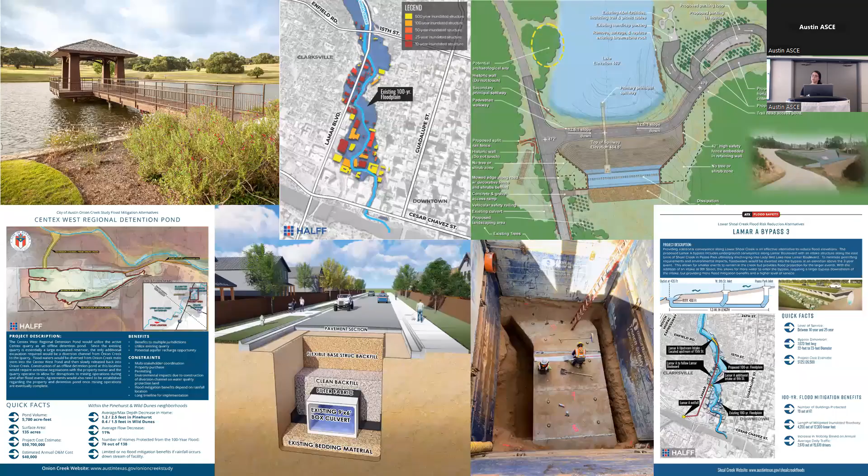Our Richardson office is our headquarters. And then furthermore, in the last couple of years, we've been expanding in Austin. So we now have a North Austin and a South Austin office. All these offices really support our solutions. Halff is organized in 6 different solutions groups: energy, environmental, mobility, placemaking, technology, and water. To give you guys a little overview of some projects we are a part of here in the general area.

Right picture is the Bastrop State Park Dam. This dam actually failed in the 2015 storm events that also Austin experienced as well. So Halff was a part of the multiple different ways. We did the H&H analysis, the design work. We also did survey, environmental, and also engaged our landscape architecture group to help with some of the park features. So that was a fun project to be able to collaborate internally, and the dam finished construction this year.

In the center there, this was a big project last year. It was in East Austin. The two center pictures on the bottom, there was a culvert in a residential area. It outfalls into Lady Bird Lake. And the culvert was experiencing some leakage, so it was impacting the subsurface, and the residential area was having some failure in their roadway service. So we were able to excavate, fix, and repair the culvert. And then in the meantime, we also, once again, was able to engage other facets by replacing the stormwater, water, and wastewater utilities. So that residential area is now fully repaved, and also the subsurface is mitigated.

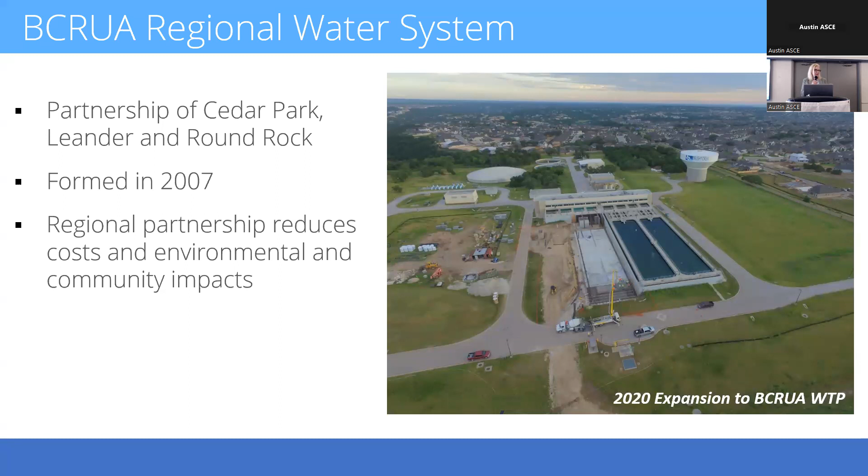This is a picture of the water treatment plant. Right now you can see there are 2 water treatment trains also completed, and we're working on the 3rd one right now because there's a lot of demand and a lot to keep up with. So this map shows the facilities that were built.

The red line is, you can see Lake Travis, the arm of Lake Travis is on. The red line is a pipeline that goes all the way to Round Rock. So all that infrastructure was built initially—about $130 million loan taken out from the Texas Water Development Board, and that all occurred in 2012.

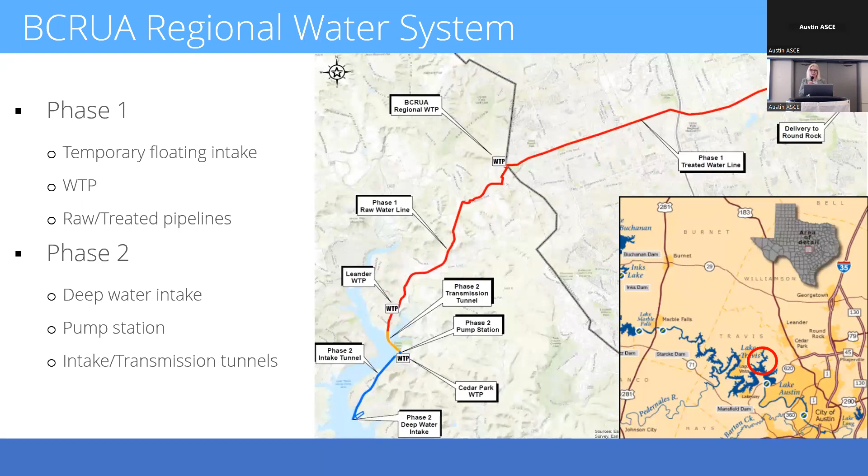Well, all along, the cities realized that floating intake on Lake Travis would not be a good long-term solution. So that's phase 2, deep water intake. But it was really planned from the very beginning. So this is a picture of the floating intake on Lake Travis.

Lake Travis hydrology, which I know some of you all do, but there was one year when Lake Travis came up over 50. So it is definitely—there needed to be a more secure, reliable option to pump water up to the cities than this. But that's been working pretty well so far, except for when the zebra mussels showed up. That's another story.

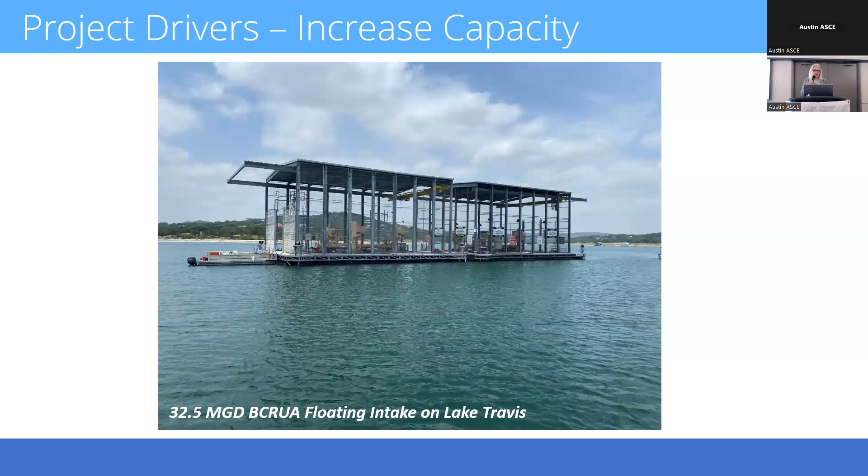But when the lake's high, okay, plenty of water. But look what happened in 2013 when the lake got low—those intakes were out of the water. In fact, Leander and Cedar Park built what they call their drought barge that could be extended further. They actually built, Aaron could probably go into this, but they built a pipeline and basically snaked it between that marina there. So we know that even looking at the fluctuations we're seeing this year, that we needed to have intake in a much deeper location.

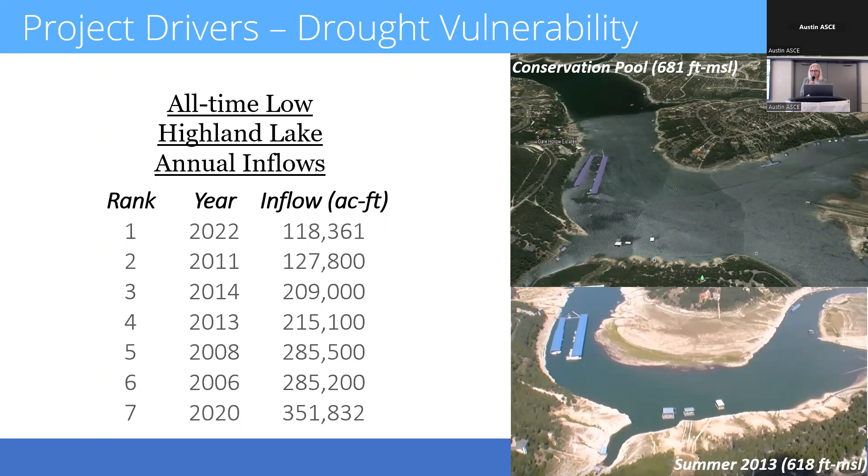And so those were some of the project drivers. As far as the plan right now, it's been, I said, for looks like 17 years. And a lot of that was getting all the 3 cities together.

It's interesting when you form a partnership, all those soft skills you need as an engineer. But when you bring 3 different parties together, of course, everybody knows that regionalization is the way to go, but it does bring all these disparate people together with different projects. So a lot of that got worked out through the planning period so that everybody's come to agreement on how to move forward.

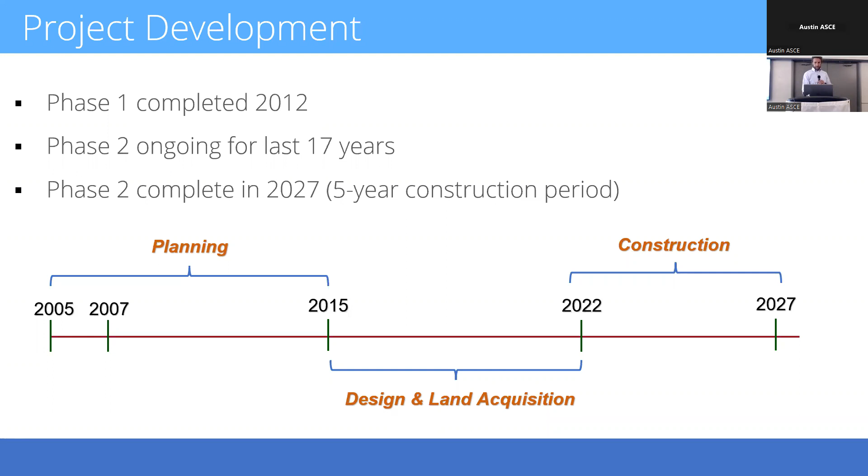When I guess, Karen, when you were sealing that report, I've worked on this project a long time, but at that point, I was learning how to drive a car and getting my braces removed.

So let's talk about the construction contract. The contractor is a joint venture of Thalle and SAK, and we selected them through a competitive sealed proposal process where we got to make a selection based on both cost and non-cost factors, including their qualifications.

Like Karen mentioned, we're almost exactly 1 year into construction. With a 5-year construction duration, that puts us close to 20%. The contract value is just shy of $225 million, and construction management services on behalf of BCRUA are being performed by Walker Partners and Freese & Nichols.

So I want to drill into the project overview, the layout a little bit closer. This is a blow up of the map that Karen showed you. The ultimate capacity for phase 2 is 145 million gallons per day, which will meet the build out water requirements for Cedar Park, Round Rock, and Leander.

The major project components, the way that the water flows: first, up in the upper left-hand corner in the lake, is an intake at a deep location. It's about 125 feet deep there when the lake is at conservation pool. Adjacent to it on shore is a maintenance building - I'll tell you more about the purpose of it in a little bit. The blue line is an intake tunnel that conveys water by gravity back to a remotely located pump station.

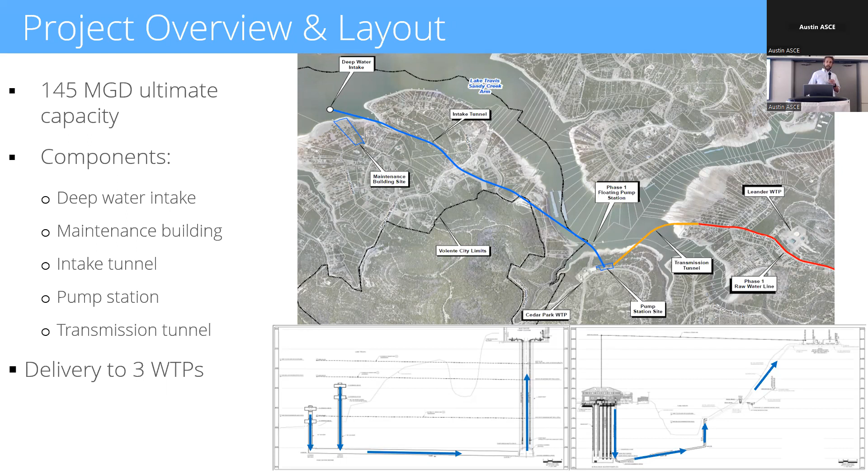So I want to start now on the main shaft. The main shaft is at the pump station site next to Cedar Park's plant. This is really the heart of the project right now for the work that has gone on for the last year and will continue for the next year and a half. This is the access shaft for all of the underground work for the tunnels going both directions.

It's a 30-foot diameter shaft, 300 feet deep, and these are some photographs you can see from construction progress. The shaft is actually complete at this time.

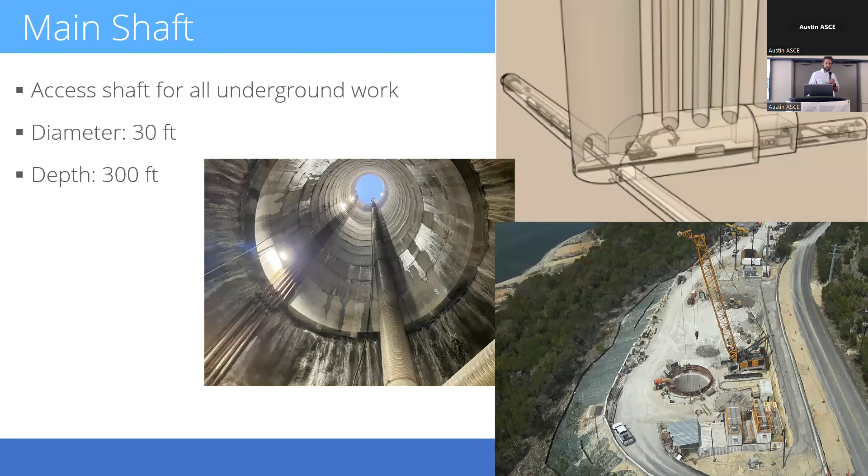It was excavated by hydraulic breakers. The rock quality is really good - it's limestone with an unconfined compressive strength of about 4,000 PSI. We haven't encountered any voids or any other issues during construction. Initial support was minimal, rock bolts and shotcrete, and the final liner is a cast-in-place concrete liner.

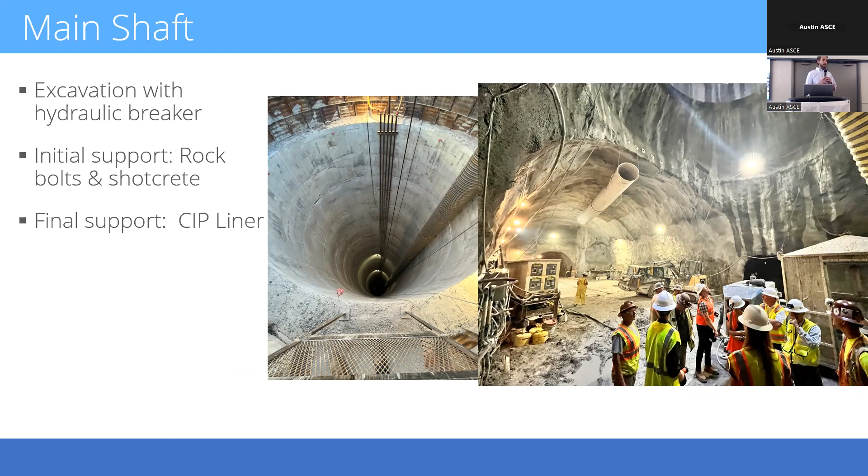The contractor elected to do a top-down installation method for this liner, which means that as they constructed, they would excavate, set up formwork, do a concrete placement, continue excavation, jump the formwork, and build it on their way down, versus excavating the shaft and building it up from the bottom to the top.

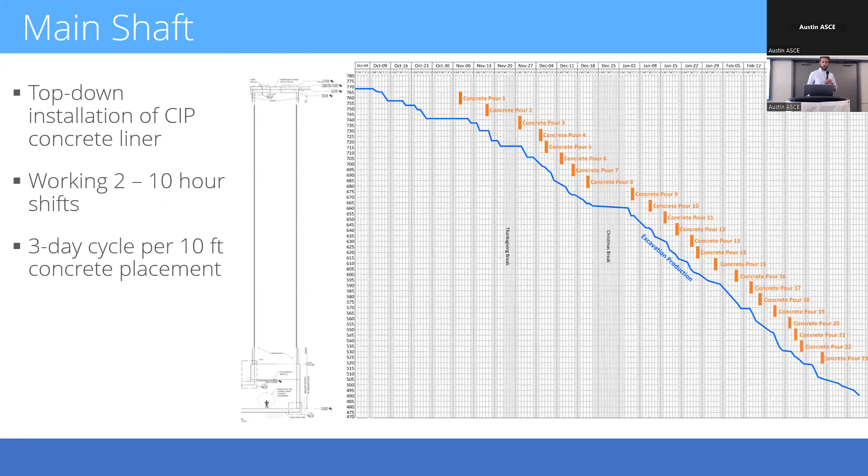They really did a good job getting into a 3-day cycle for constructing this liner, where they would excavate, jump the form, do a placement. You can see they really picked that up after the 3rd or 4th concrete placement, working 2 10-hour shifts.

Down at the bottom of the shaft, connected to the shaft, is the suction chamber. This is a large underground horseshoe-shaped chamber that the pumps take suction out of. It's about 90 feet long, 30 feet wide, and 20 feet tall.

It was constructed in three different headings, a top heading, and then an upper and a lower heading, by hydraulic breaker and also using a roadheader. In the upper right-hand corner, you can see a roadheader. It's basically a cutting tool on a boom that allows them to achieve that horseshoe shape. The suction chamber at this point has been constructed, and eventually, towards the end of the underground work, they'll come in and put in a cast-in-place concrete liner.

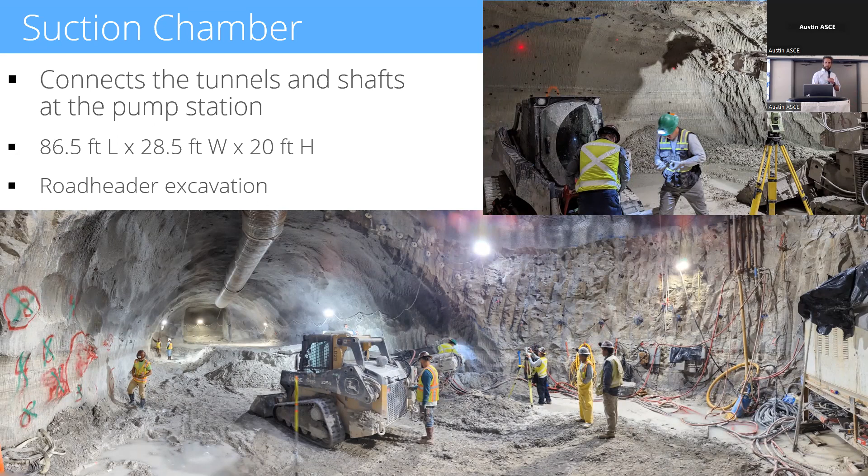Where the contractor is right now is construction of the transmission tunnel, which is the gold line that I had shown you previously. It's about 2,600 feet long, and it'll be constructed at a 3% slope, sloping up towards its endpoint so that any kind of water or seepage into that tunnel flows back to the main shaft for removal.

At this point, this is really tight rock, so we've seen very little seepage into the tunnel, which is what we expected. It'll be constructed by an open rock tunnel boring machine. It's 11-foot diameter, and these tunnel contractors like to name their TBMs. This one is named Miss Chelsea, and this is Miss Chelsea now.

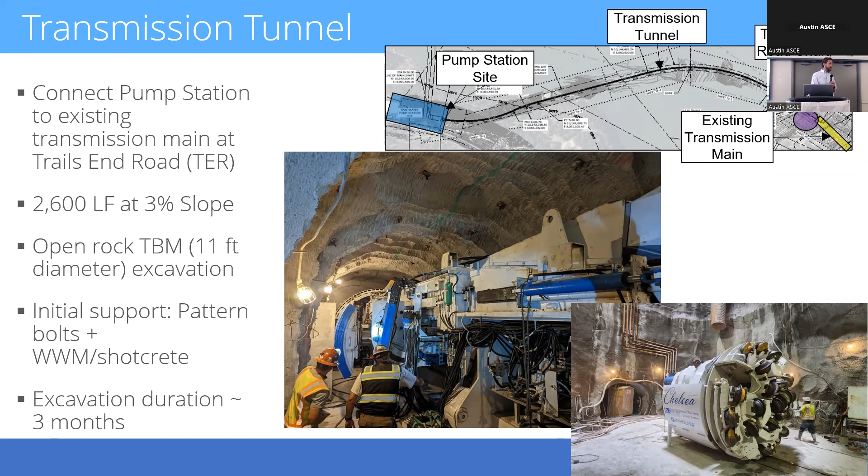She has been assembled down underground, and they have just started mining the transmission tunnel. Because of high quality rock, initial support again is fairly limited, pattern bolts and shotcrete, and we anticipate construction requiring about 3 months for them to get to the end of this tunnel.

Once they get there, they arrive to what we call the Trails End Road shaft, which is a vertical shaft where the transmission pipeline, a welded steel pipeline that'll be placed in the tunnel, will go vertical to take us back up to grade so that we can connect to the original phase 1 raw water line.

It's 130 feet deep, constructed by a blind bore construction method. You can see the pile top rig to the right that was used to construct that blind bore.

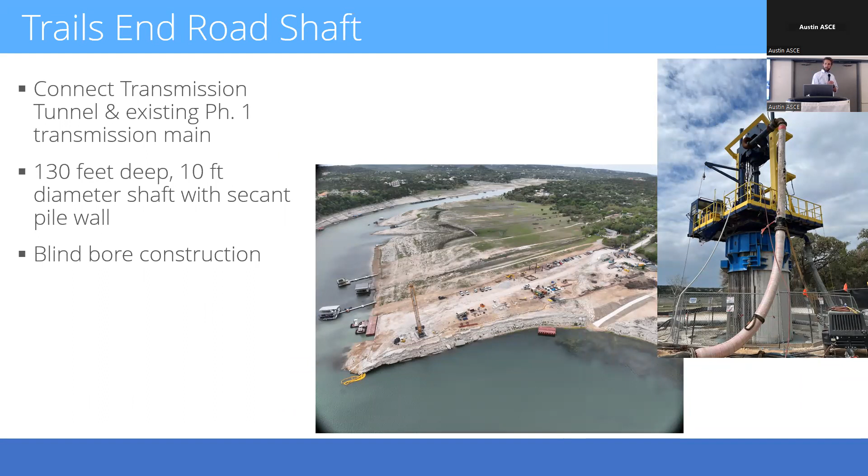An interesting thing about this shaft location is that it did require a secant pile wall. This is the only location on the project where we had any real overburden, and so we need to do that to have support through the overburden.

The shaft location is just about 4 feet higher than the conservation elevation of Lake Travis. Lake Travis is really low right now, so you wouldn't guess this if you went out there. The lake is very far away from the shaft, but it is very possible that it could come up and end up going through the overburden, basically flooding the tunnel.

So we have a secant pile wall socketed into rock, and the contractor is right now planning to take the steel pipe pieces and place them in the shaft and grout them in place. Once that steel pipe is placed in the shaft vertically, there'll be a bulkhead on top of it so that water cannot enter the shaft for the underground construction.

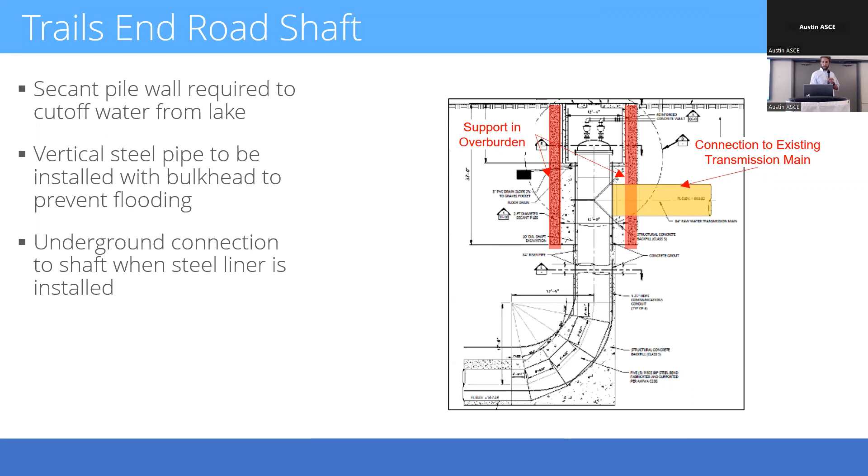3 months from now, the contractor will be done mining the transmission tunnel. So they'll walk the TBM back out and they'll start construction on the intake tunnel. The intake tunnel heads the other direction, connecting the pump station to the intakes.

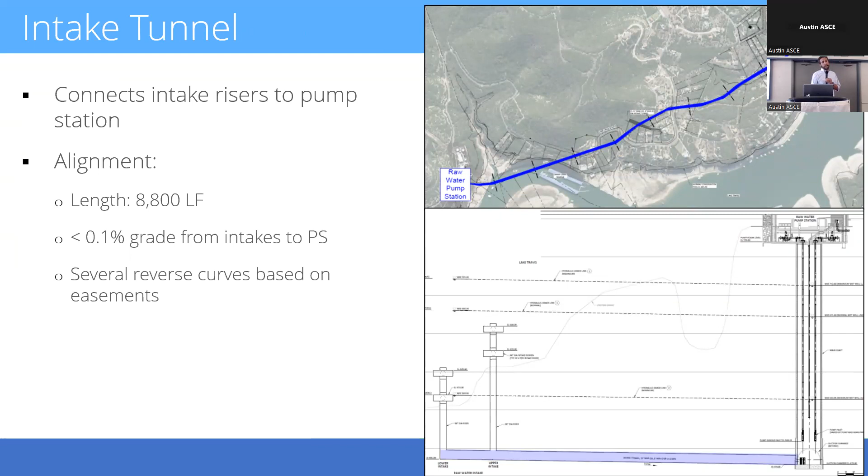That was part of what we had to do for easement acquisition. There's a lot of Balcones Canyonland Preserve out around the lake at this location, so we needed to avoid it. We were not allowed to tunnel beneath it.

The final liner for the intake tunnel, because this is not pressurized, it'll be gravity flow, is going to be cast in place concrete. The contractor estimates about 9 months to complete mining of the intake tunnel, and they do anticipate having an on-site batch plant for concrete production because there'll be a lot of concrete.

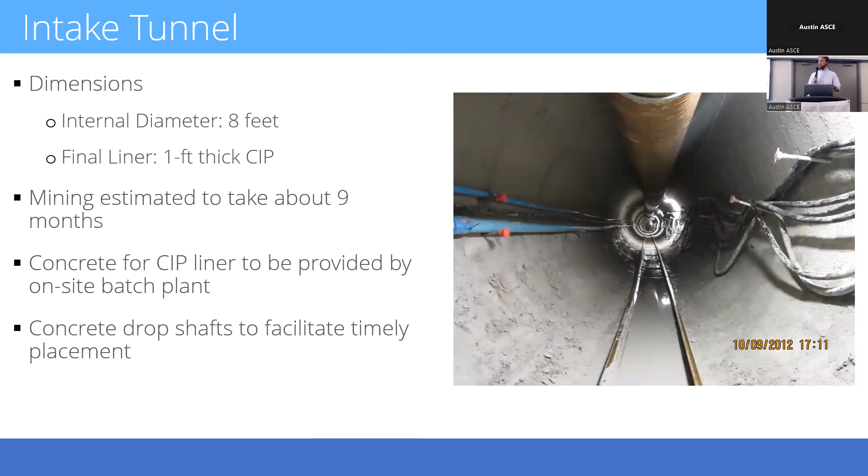We did go during the design phase and acquire some easements for concrete drop shafts to facilitate getting that concrete up to the face of the cast in place operation.

When all of these tunnels are done, we'll go back to the pump station and start working on the pump shafts. The pump shafts are basically vertical shafts that go from the pump station above down to the crown of the suction chamber.

There'll be 6 of them with an 8-foot outer diameter and a 6-foot internal diameter. We'll place pumps in those shafts to take suction out of the suction chamber, for a total of 6 pumps at the suction chamber. We'll also put 4 pumps in the main shaft, so up to 10 pumps at build out.

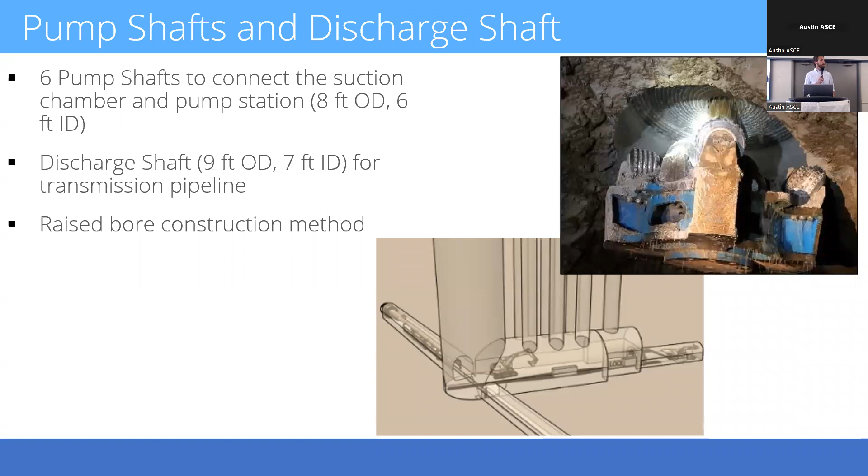There's also a shaft that will be constructed for the discharge pipeline, to take that pipeline and run it out the transmission tunnel back across the lake. Because the contractor has access underneath to work where they've already built the suction chamber, they'll use a raised bore method, where they drill a pilot down into the underground space, then connect a cutter head, which you can see in the photograph here, and pull that back up to the surface to excavate the shaft.

Now I want to move out to the lake and talk about the intake and the maintenance building. This is an architectural rendering of what it would look like at some point in 2027, with the lake being a lot fuller than it is today.

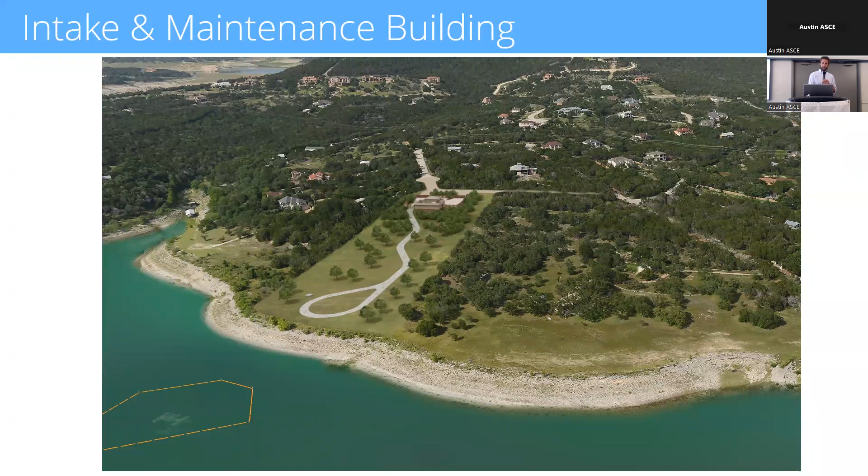The intake facilities consist of two individual riser pipes that connect the screens in the lake to the intake tunnel down below. Each riser pipe has a pair of screens, so we have 4 different elevations that BCRUA can withdraw water from Lake Travis.

The reason we do that is in the summertime in Lake Travis, a thermocline sets up. If you're a diver and got certified in Lake Travis like I did, you've experienced the thermocline. When you get there, the temperature is significantly lower than the water above, and water quality is very poor. It has low dissolved oxygen, dissolved iron and manganese, and things that make treatment difficult. So we want to try to take water in the upper 30 or 40 feet of the water column.

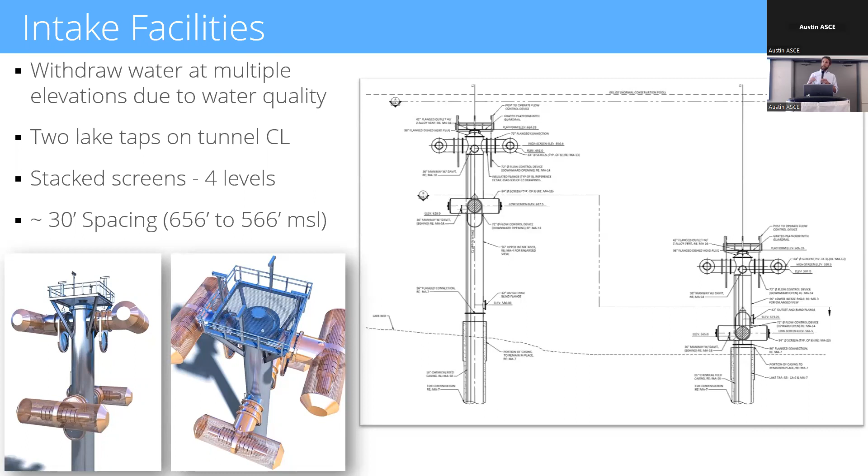Because Lake Travis is a variable level lake, we need to have multiple intakes to allow for that. Both of the intake lake taps are centered on the tunnel, and they'll be comprised of 96-inch diameter, 316 stainless steel pipe. Right now, since the contractor is almost done constructing the shafts for these intakes, they'll be in short order getting this 96-inch diameter stainless steel pipe ready to float out in the lake and drop down in the holes to grout in place.

These are just a couple construction photos of work out on the lake. They have a pretty significant flotilla out there completing this work. If you're familiar with Lake Travis, you're actually pretty close to Starnes Island off the shoreline of Volente. You can see the 2 casings being used to facilitate construction of the blind bore lake taps using reverse circulation drilling. They've basically got a water treatment unit out there with them so they can settle out spoils and then return that water and continue to use it.

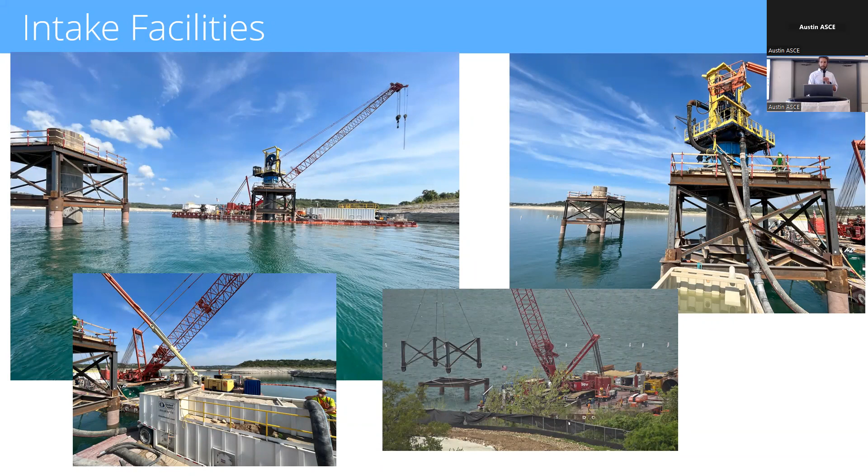So let's talk about how the intake tunnel and the lake tap connection will work. The lake taps will be completed before the tunnel boring machine ever gets out there. They'll be grouted in place, and there'll be a grout plug beneath the intake riser pipes that the boring machine can mine through. So as the boring operation approaches the lake taps, they'll be doing probing and grouting.

We want to make extra sure that no water can make its way from the lake above into the tunnel below. They will mine beneath both of the lake taps and add some extra support as required at those locations.

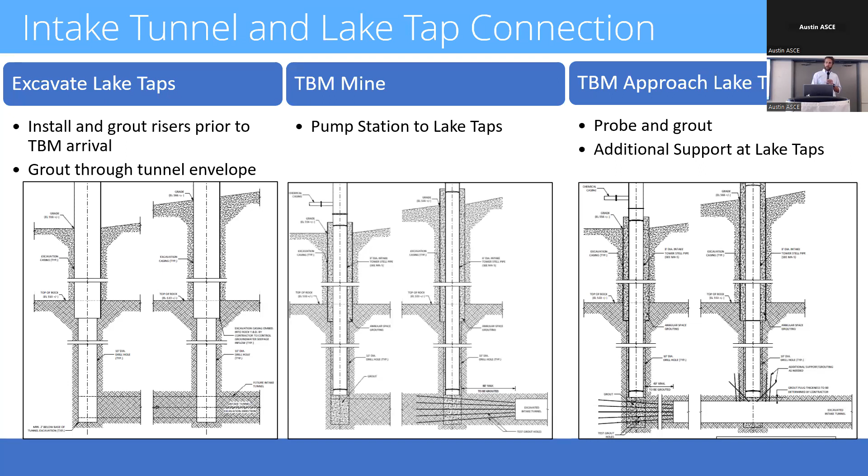Eventually, they will make their connections to both of those riser pipes before they walk the TBM back out. Each of these 2 riser pipes has a pair of bulkheads on it so that we can make sure, again, that water does not enter the underground until we are ready to flood it.

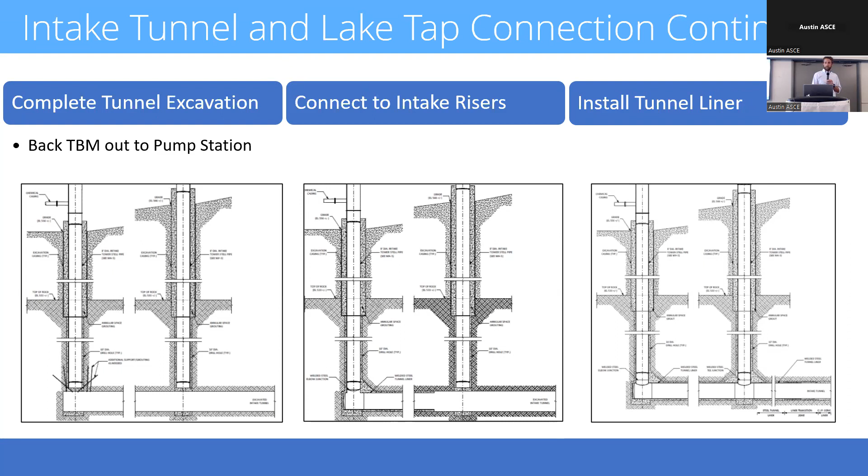Okay, so the maintenance building.

Well, the purpose of the maintenance building is to control invasive mussels. And we were planning on needing a maintenance building for invasive mussels before they ever showed up in the lake.

Who wants to hear an interesting story about mussels? Good, that's the story I practiced. So...

Invasive mussels, zebra mussels, which are probably not the last invasive mussel that we're going to see in Lake Travis, but they're the one that are there now. If you've gone there and you were barefoot, you probably found out the hard way. But they showed up in the lake about 4 years ago. And 1 year after they showed up, BCRUA decided, why don't we go look at our floating intake pumps and see if any mussels have attached to it.

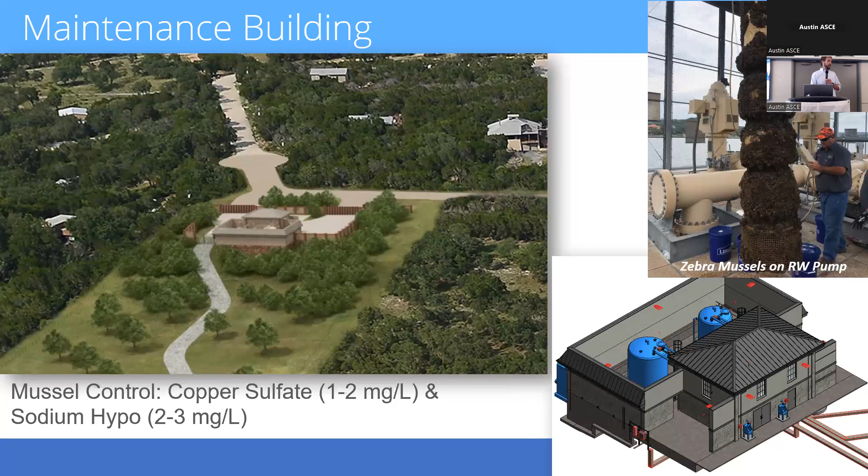We have 2 chemical feed systems for the maintenance building. One is copper sulfate, which we anticipate dosing pretty much around the clock during the year. And then if we feel that we need a stronger oxidant to deal with some stubborn mussel issues, we do have sodium hypochlorite, which is liquid bleach, that we could apply as well. But we wouldn't anticipate applying sodium hypochlorite on a regular basis because it can create issues with disinfection byproducts later.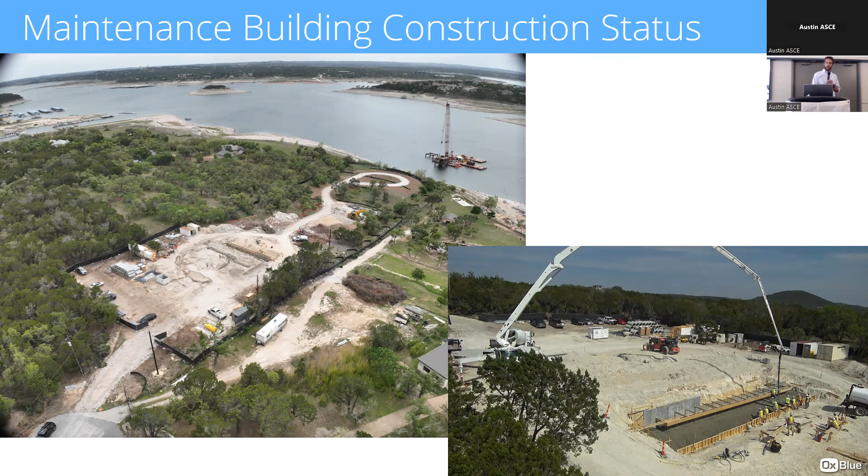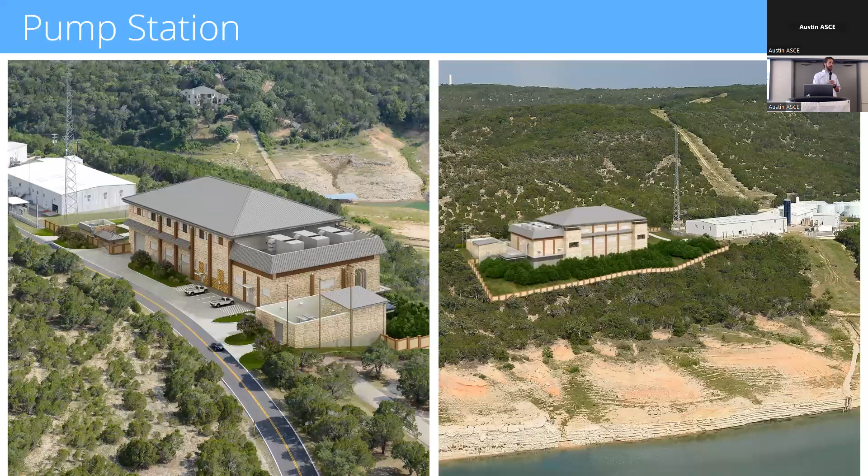Now jumping from the lake side over to the pump station. This is an architectural rendering of the pump station. It's a significant building, about 18,000 square feet. It is a very tiny site. It was formerly a portion of park property that was acquired for this purpose. And so we minimized how much land would be required for the facility.

One of the most interesting aspects of design of the pump station was actually picking a pump. These are very, very deep pumps. And so early in the design process, we elected to use submersible pumps and motors. The reasons we did that: first, it simplifies maintenance. If you have to pull one of these pumps to do maintenance on it, it would take a day or two. There's a lot of column pipe to disassemble and put back together.

A vertical turbine pump with a line shaft going down the middle would take 1 to 2 weeks to pull it and another 1 to 2 weeks to put it in. It also reduces or virtually eliminates noise because the motor is down underground and underwater. When you go by a submersible pump like this, you really can't even tell that it's operating. You kind of have to feel the discharge elbow to tell that it's even pumping. And then lastly, with long line shaft pumps, you really have to be cautious about shaft strain and vibration issues. Submersible pumps don't have that problem.

We eliminate those concerns. There's actually, in this pump station, 2 separate systems, 2 separate pump stations within the one building. One will convey water to Cedar Park's plant next door. There'll be 4 pumps in that main shaft that gets repurposed as a wet well. The other 6 pumps will send water back across the lake. And we've got 3 different pump designs ranging from small motors at 550 horsepower up to 3,600 horsepower motors.

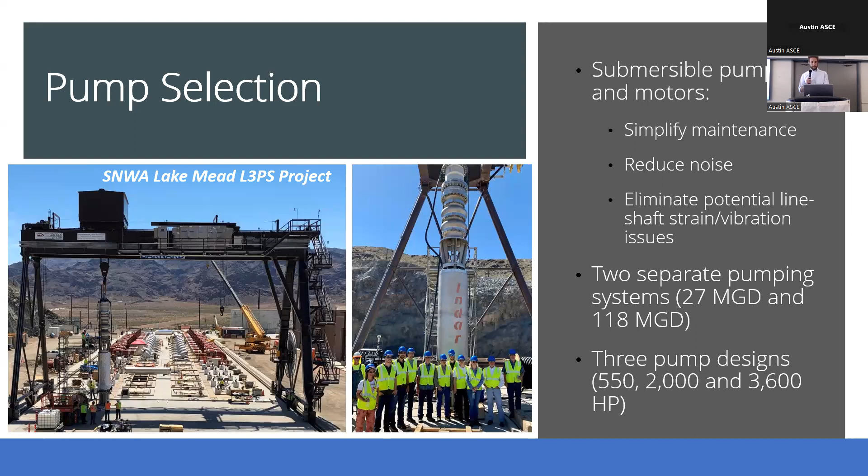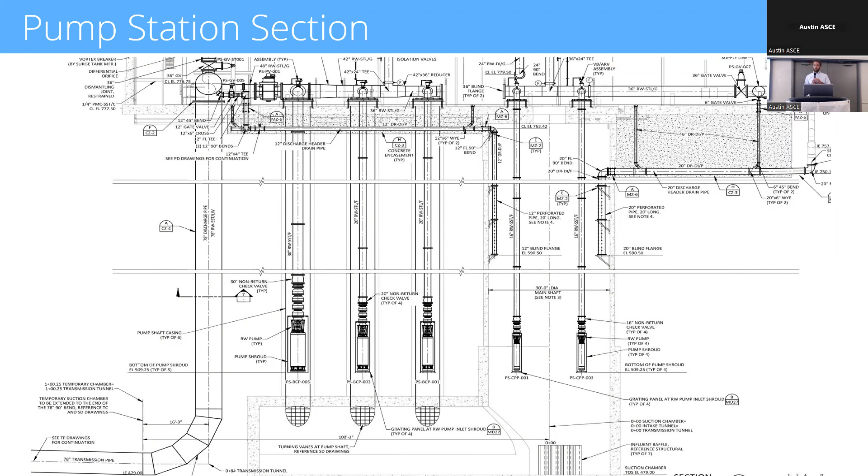So third-party coordination - if there's any part of the project that gave me gray hair, this was it. We had a lot of regulatory agencies that were interested in the project that we had to pull permits from: the Corps of Engineers, City of Austin and Travis County, the LCRA, and years and years of work with the Village of Volente, Balcones Canyonlands Preserve, and TCEQ.

Water Development Board, as Karen had mentioned, has been funding this project from the beginning and is funding phase 2. And then we had to acquire land rights from 202 parcels, and only a small fraction of those were really needed for the tunnels and water side of this project.

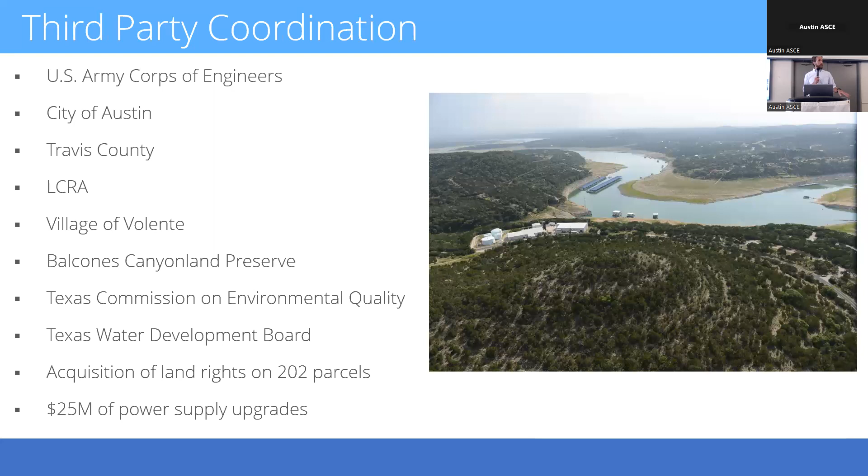Yes, you still have to get an easement for a deep subsurface tunnel. But the electric utility out there looked at this as basically a line extension request and told us that we needed to figure out the routing and obtain all the easements necessary to get dual feed overhead power to the site. So that added a lot of easements in addition to a substation expansion, all coming in at a price tag of about $25 million, which is not part of the construction contract.

So with that, I do want to acknowledge and thank our owner team, of course BCRUA, the 3 cities - Cedar Park, Round Rock, and Leander. Freese and Nichols, our joint venture partner with Walker Partners. And then Schnabel Engineering and K Friese and Associates had a major role in the project. And then, of course, our contractor, the LSAK joint venture. And with that, Karen and I would be happy to answer any questions.

I think we've got a few more minutes. Yes, sir, what was it at the end you said there about that dual overhead power - was that the agency that will fund it? Pedernales Electric Co-op provides power in this area.

Did y'all have to go through a NEPA process? We didn't have to go through a full-blown NEPA process now. Just an EA? Yes, just an EA, sir. Backup power is off the electric grid. Generators are not really feasible at this location, but the power load we have...

We have installed a number of monitoring wells along the alignment, both in the aquifer below where residential wells would be located, or domestic water supply, which is on average about 100 feet above the tunnel. And then we have piezometers in the tunnel zone, and we've been monitoring those for years to develop some baseline data to understand if there's an impact as construction commences. We also have requirements for the contractor on monitoring seepage into the tunnel. But at this point, if anything, they're more often having to introduce water to control dust because there's almost no seepage - it's extremely tight limestone rock.